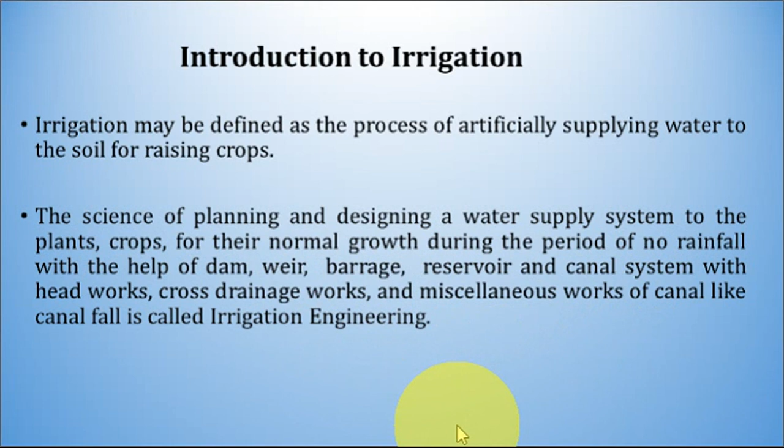The science of planning and designing a water supply system to the plants and crops for their normal growth during the period of no rainfall with the help of dam, weir, barrage, reservoir and canal system with headworks, cross drainage works and miscellaneous works of canal like canal fall is called irrigation engineering. These constituents like dam, weir, barrages, reservoirs, canal systems are all the constituents of irrigation engineering.

So what is the necessity of irrigation? Insufficient rainfall, this is the first. Irrigation is necessary in the areas where rainfall is insufficient for the satisfactory growth of the crops and the plants. Second, sometimes there is non-uniform rainfall. Sometimes distribution of rainfall in the zone of crop area is uneven or non-uniform.

Then for growing perennial crops, some perennial crops require water throughout the year. For the growth or production of the perennial crops, irrigation is necessary. You cannot ensure the availability of rainwater throughout the year, so irrigation is a must for the perennial crops. Then ill-timed rainfall: as and when water is required by the crops, there is no rainfall to fulfill the water need. Irrigation is a must.

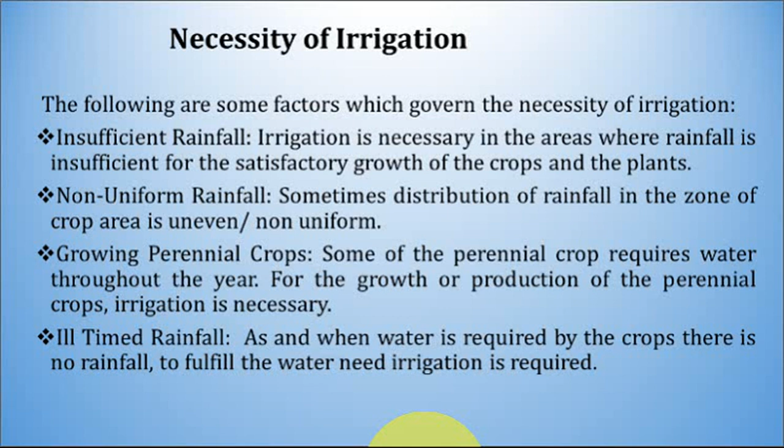Now the advantages of irrigation. Irrigation has some advantages as well as disadvantages too. So let us start with the advantages. It increases the food production, it increases the income and national cash flow, it increases labor employment, it increases standard of living, it increases value of the land, it improves communication and navigation facilities, it also helps in domestic and industrial water supplies, it improves groundwater storage, it helps in generation of hydroelectric power, and it reduces the risk of catastrophic damage caused by drought.

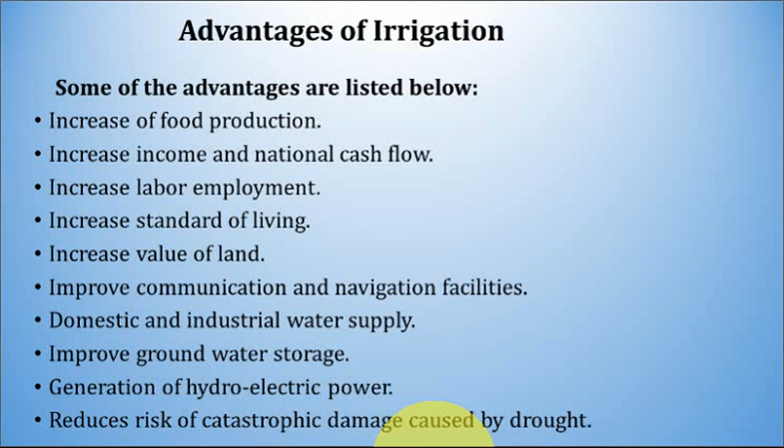Here are several disadvantages. Due to irrigation or excess irrigation, you may face waterlogging in a particular area. If salts are present, the land will possess salinity and alkalinity due to excess irrigation. Ill aeration of soil, since all the voids will be filled by water. If excess irrigation is done, aeration will not be there.

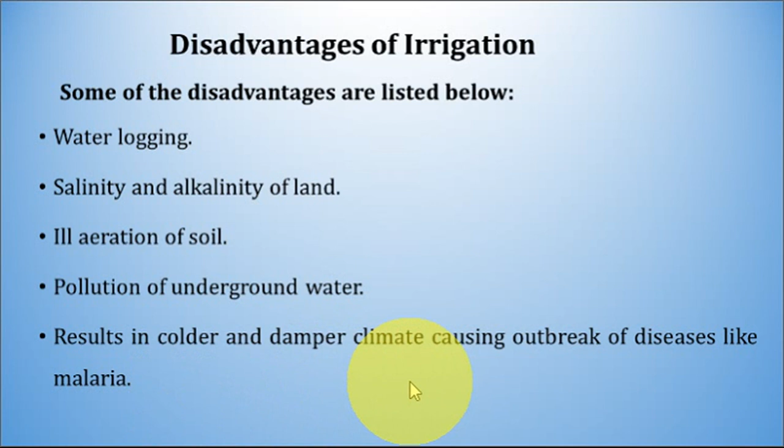Then pollution of underground water due to use of pesticides: the water will percolate to the ground and will contain amounts of pesticides and their residues, so it will contaminate the underground water. It results in colder and damper climate causing outbreak of diseases like malaria. Why malaria happens? Due to ponding of water, there is growth of malarial mosquitoes, so in turn it is also a hazard of causing outbreak of malaria in such situations.

Now let us turn towards the methods of irrigation. Briefly, there are three methods: surface irrigation, subsurface irrigation, and micro irrigation. Surface irrigation includes free flooding, border flooding, check flooding, basin flooding, and furrow methods. We will see the terms in detail later. In micro irrigation, there is drip irrigation and sprinkler irrigation.

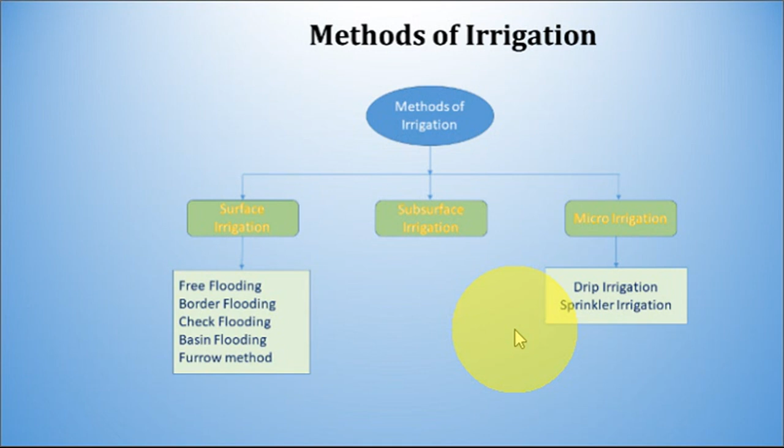So let us start with the free flooding method. So let us see the figure. There is a main supply ditch. This is the main supply ditch, which has these subsidiary ditches, and through the subsidiary ditches, through these outlets, the crops are getting their water.

So it is also called wild flooding, since no attempt is made to control the flow by means of levees. This method is suitable for closely growing crops. Ditches are excavated in the field either on the contour or up and down the slope. So this is the free flooding method.

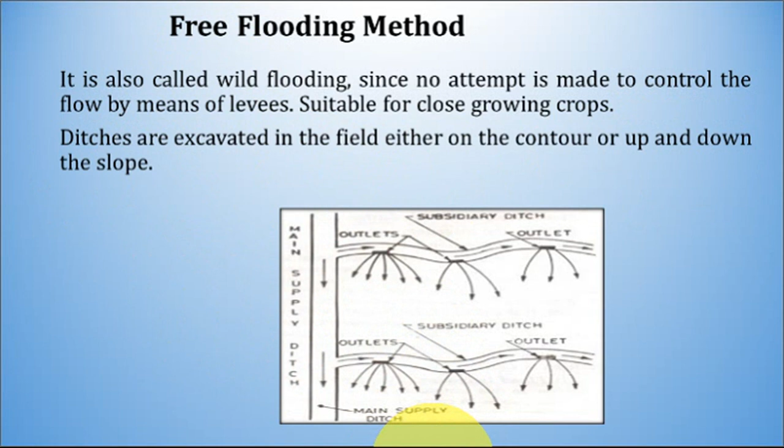Second is the border strip method. In this method, land is divided into a number of strips by low levees. The width of the strip varies from 10 to 20 meters and length varies from 100 to 400 meters. This is the length, 100 to 400 meters, and for this strip the width is 10 to 20 meters.

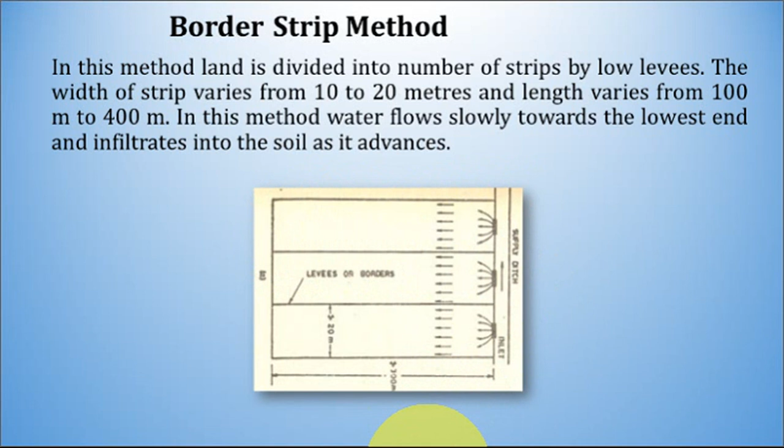In this method, water flows slowly towards the lowest end and infiltrates into the soil as it advances. So this is the main supply ditch, through which water is advancing, and it is being percolated as and when it is advancing. This is the border strip method. The entire land is divided into a number of strips.

Then this is the check flooding method. This method is a modification over the border strip method. In this method, water is controlled by surrounding the check area with low and flat levees. Levees are generally constructed along the contours having a vertical interval of about 5 to 10 centimeters. These levees are connected with cross levees at convenient places. This method of irrigation is suitable for grain crops.

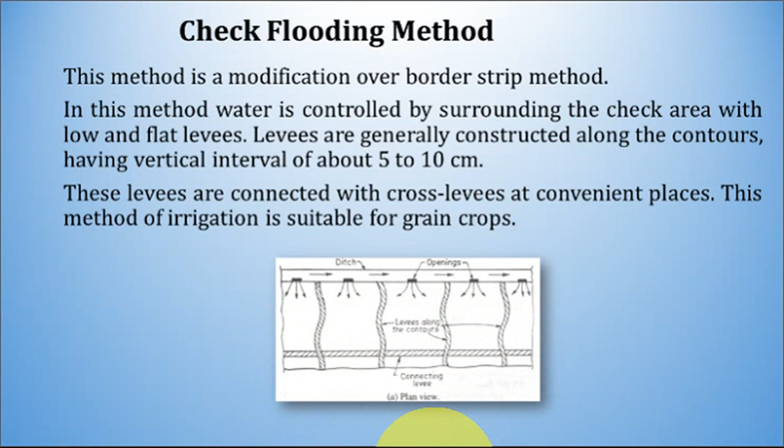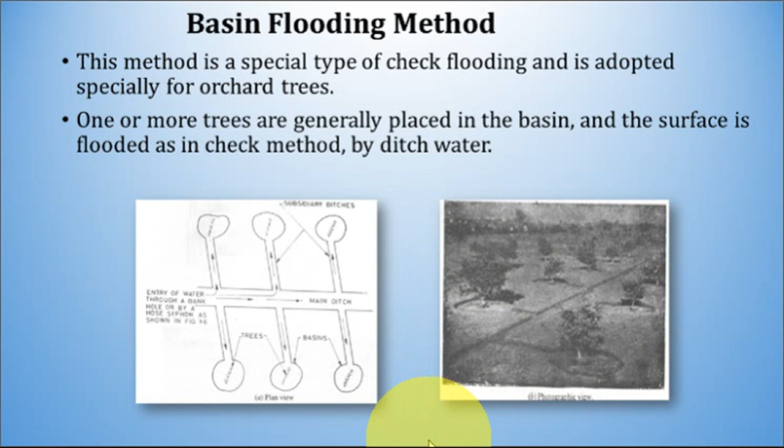Next is the furrow method. In flooding methods, water covers the entire surface, while in the furrow irrigation method, only 1/5 to 1/2 of the land surface is wetted by water. It therefore results in less evaporation, less puddling of soil, and permits cultivation sooner after irrigation. Water flowing in the furrows soaks into the soil and spreads laterally to irrigate the areas between furrows.

So you can see these are the furrows. Here is the main supply ditch which ensures the entry of water, and these are the furrows or field ditches which are supplying water to the sown crops, wetting the soil. The entire surface of the soil is not flooded in this particular method, and you can have cultivation sooner after the irrigation.

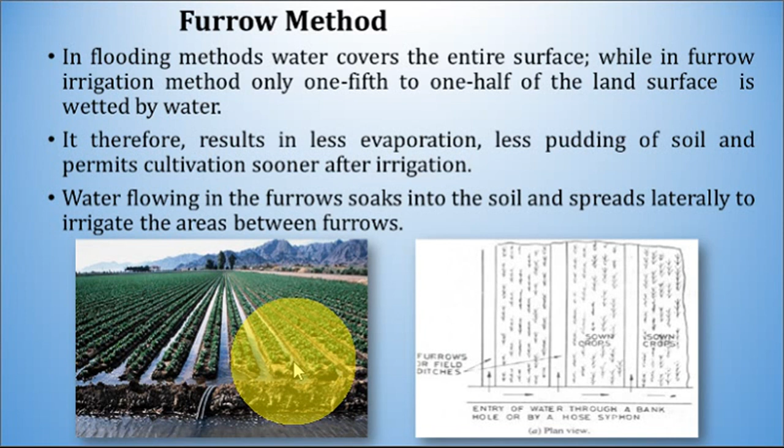So I hope you have understood the methods of irrigation.